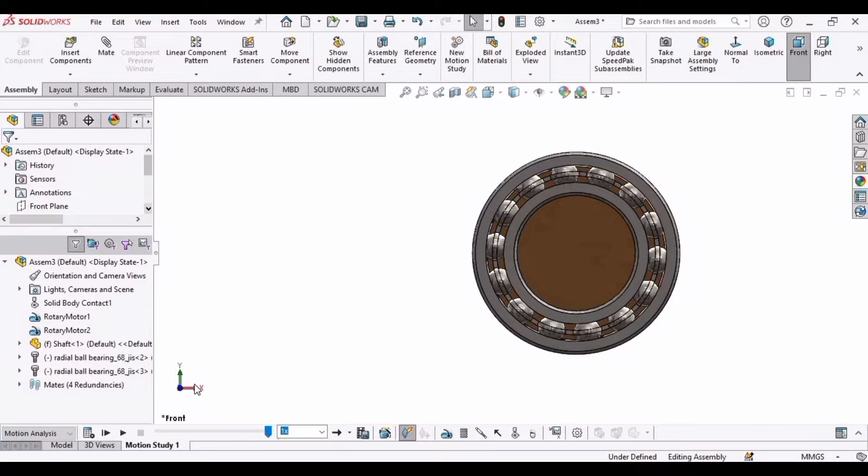Welcome to this detailed SolidWorks tutorial in which we will be designing the shaft, bearing, and performing motion study analysis on these. Let's begin. Select file, click on new, select part here, and then click OK.

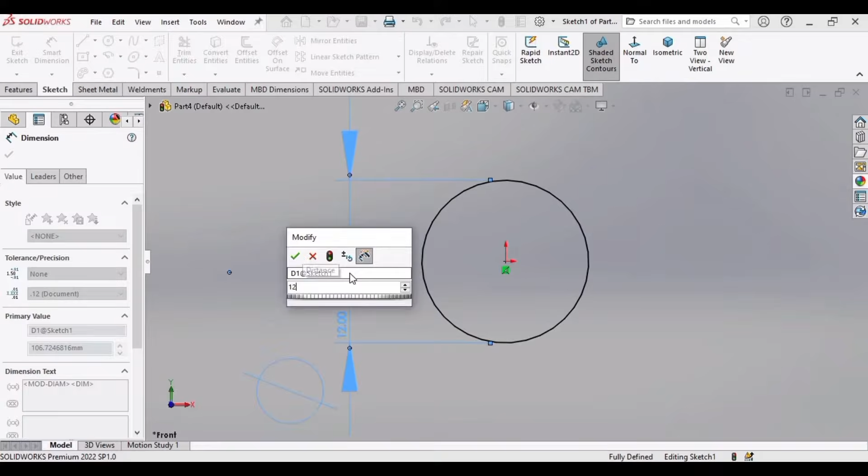Select front plane and click on sketch. Make a circle at this origin. Now let's define the diameter of this circle as 12 mm. Make sure that you have selected mmgs as units here.

Now go to features, select extruded boss base, and then simply extrude it up to 8 mm. Check this box. Now select this face, click on sketch.

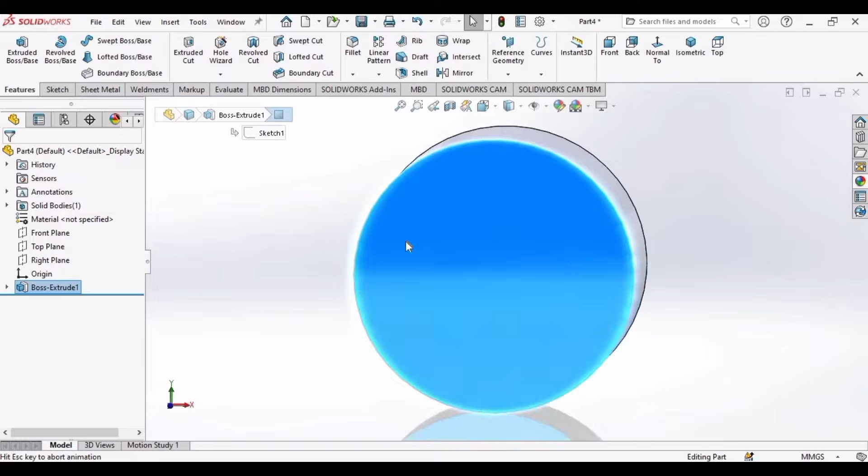Make another circle at the origin. This time we will be making a bit bigger circle. Then we will define the diameter of this circle as 18 mm.

Go to features, select extruded boss base, and extrude it up to 14 mm. And then check this box.

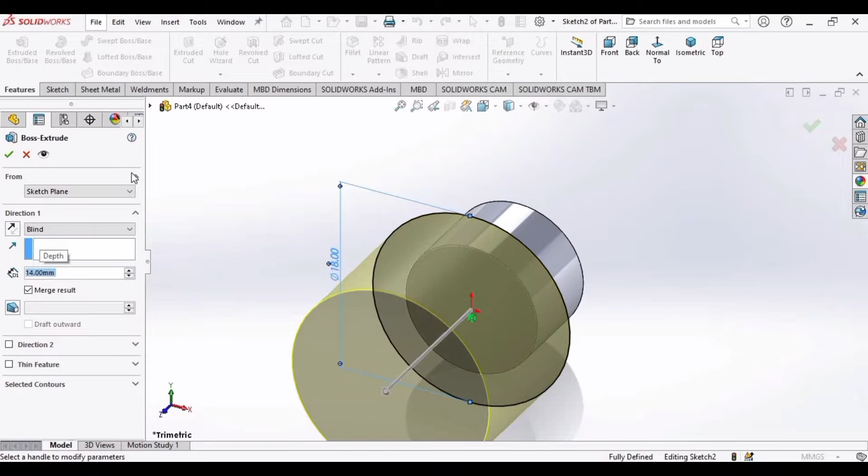Now we will perform the mirror operation, but before that we have to make a plane. So select plane, select this surface, and set this dimension to 0. This plane has been created.

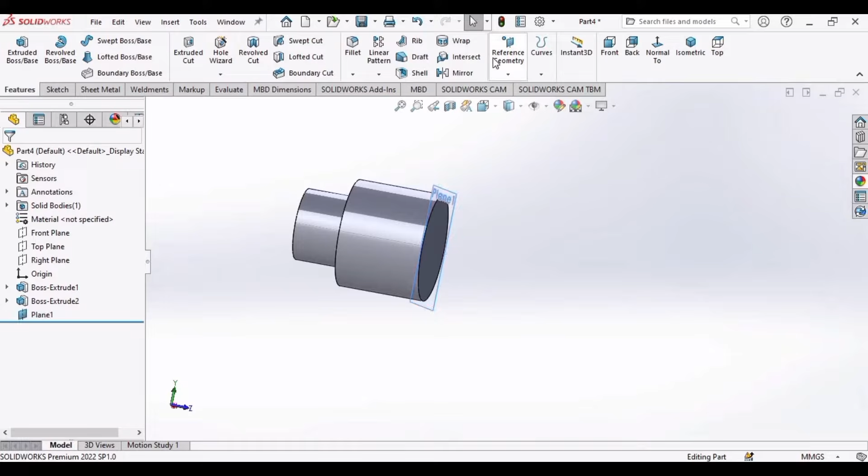Now check this box. Now select mirror, and here in this window select this plane, and we have to mirror the bodies and not the features.

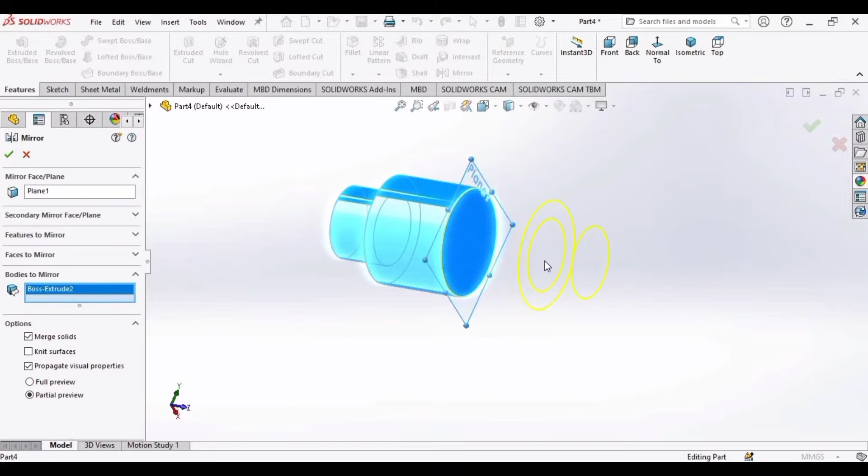Make sure that you have selected bodies to mirror, and in bodies to mirror select this shaft, and you can see these circles. Click OK, and we have successfully mirrored this shaft.

Right click on this plane and hide this plane. So we are done with designing our first component.

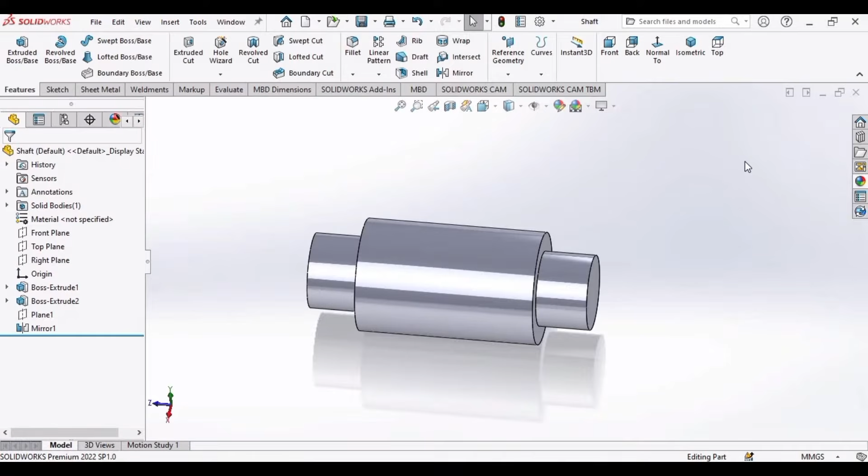Save this file as shaft, click on save, and now close this window. Now click on file and open an assembly file. This time click on assembly, click OK.

This window will be opened. From this, insert the shaft that we have just created. So we can orient this shaft.

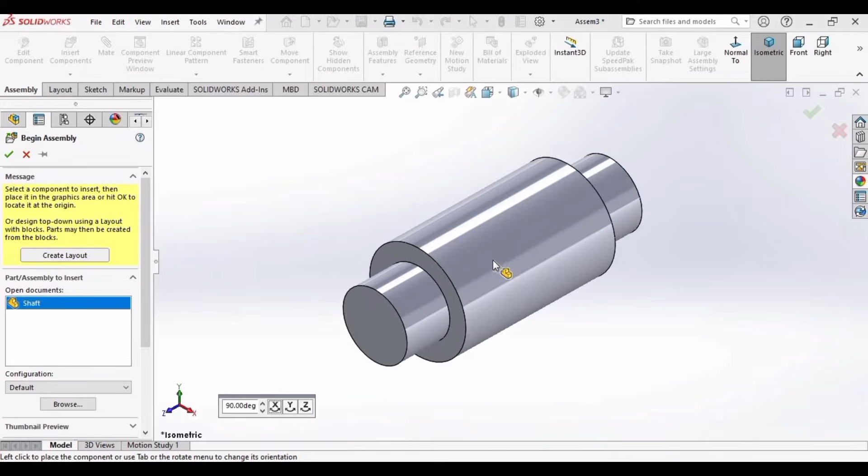In X or Y axis, this looks better. Place it here in the environment window.

Now let's apply some appearance to this shaft. In metal you can select any color. I'm assigning this brass color.

Now it's time to insert the bearings from the design library. Let me show you from the start. Let me close these tabs.

So here we have the toolbox. In case you do not have this, just drop down this menu, click on add-ins, and select these two boxes, this one, and then click OK.

Drop down this toolbox menu, scroll down, and expand this JIS bar. In this we have bearings. We have two options for bearings: ball bearing and roller bearing.

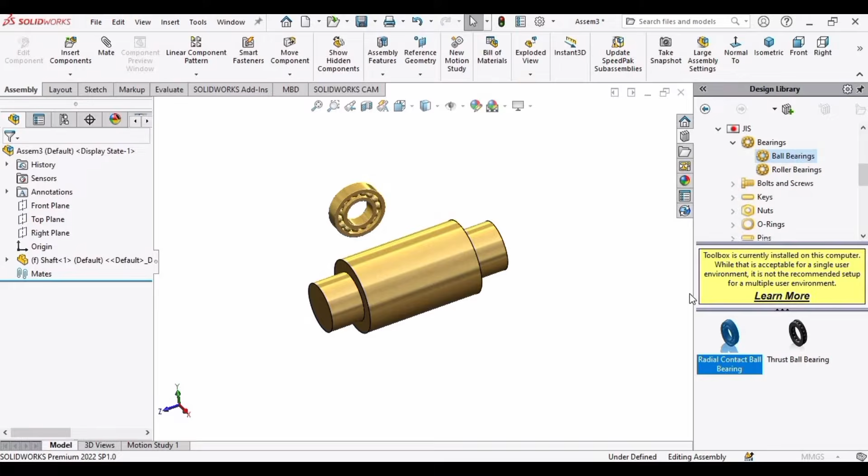Here we have also two types of bearings. We need this radial contact ball bearing. Now let's define the parameters of this.

In size window we need 2812. You have to scroll down and just look at the last one or two digits. We need 12 in the last two digits.

You have to scroll down like this and just look at the last two digits: 10, 11, 12, and in 12 just look at 2812.

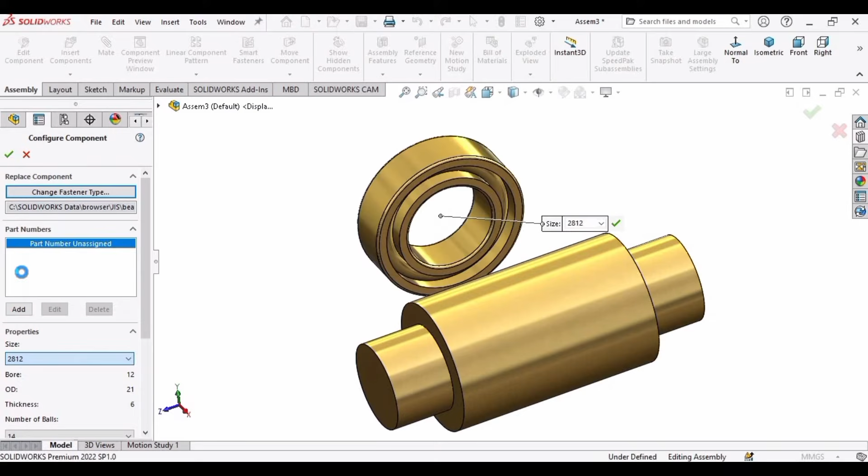So here in this select the detailed option, these balls will appear, and from here insert the cage as well. You can see this cage has been inserted. Just check this box.

Automatically this second bearing will appear here in this window. Since we need two bearings, click here, and we do not need the third bearing, so close this window.

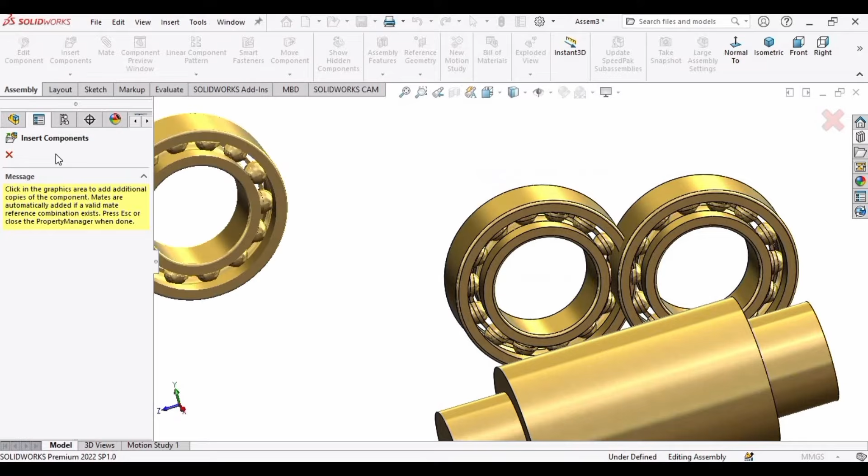So we have these two bearings now, and let's define some appearance. Let's change the color. From this window you have to select and delete all of these previous colors.

Just select and delete, and now let's define the colors again.

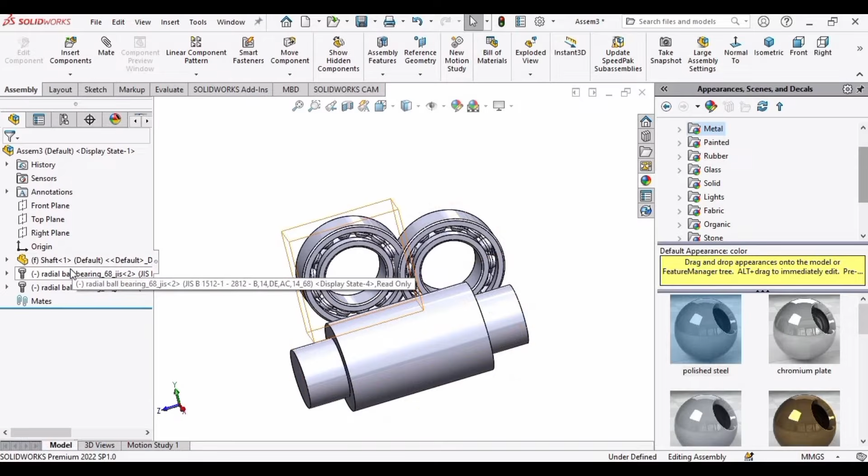Come to this window again and select the shaft first and apply this color, and select these bearings from here and apply this polished steel or any color you like.

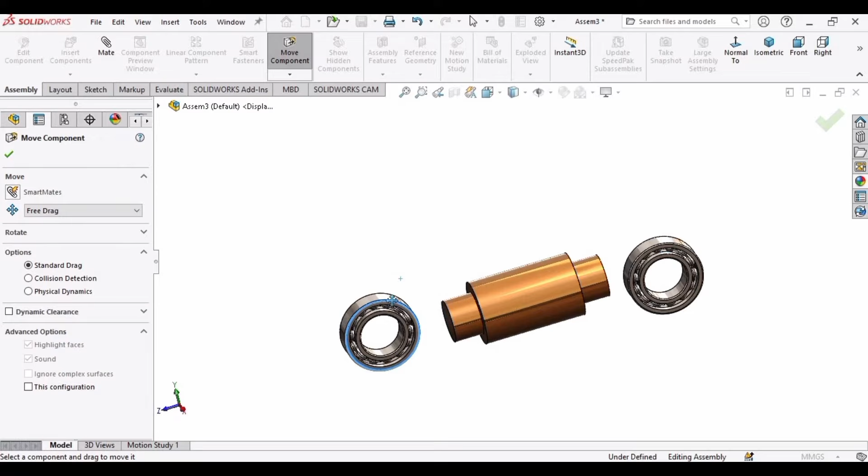Now just click on move and place the bearings at the right position. And now let's rotate these bearings.

Okay, let me tell you one more thing. This shaft should be fixed and not float.

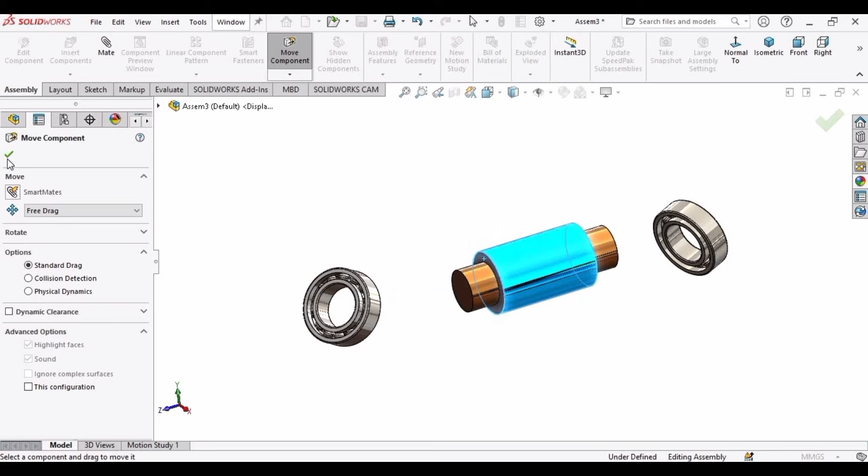Okay, so this is float now, which means that this can move like this. We do not need float, we need fixed shaft, which means it cannot move. Only bearings can rotate and move.

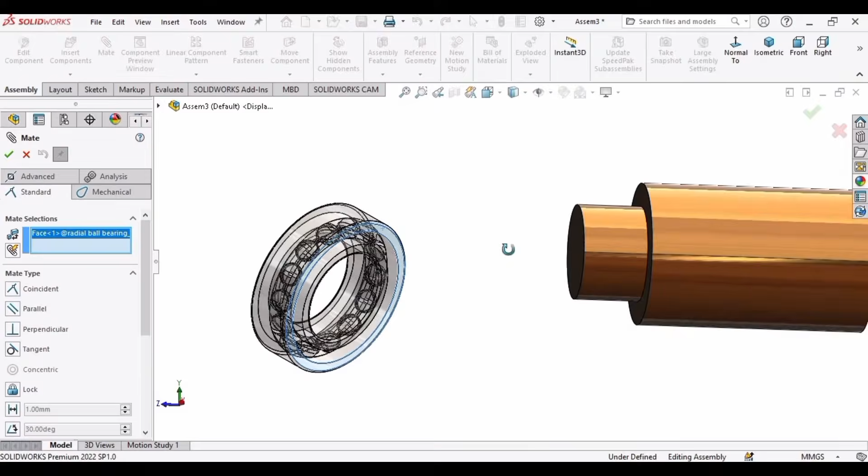Now let's rotate this bearing a little bit more, and then click on mate. Select this face of the bearing and this face of the shaft and click OK.

Now select the inner bore of the bearing and outer diameter of the shaft. These two are selected here, and then click OK.

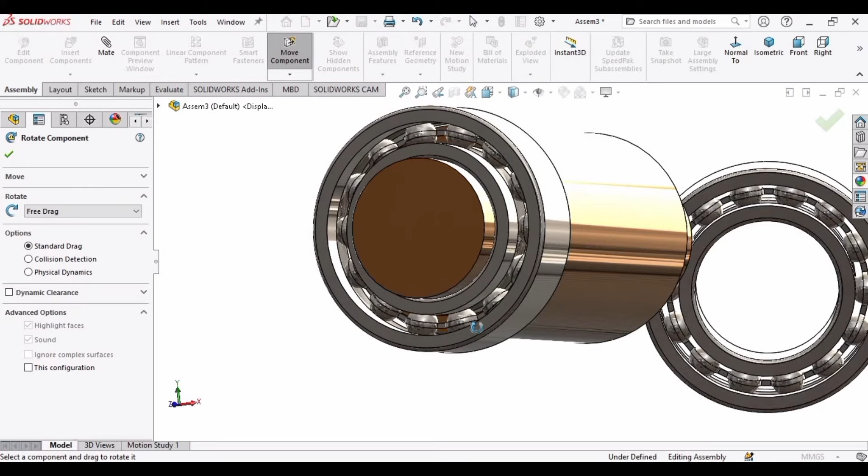Now let's rotate this and verify whether it rotates or not. Click on rotate here and manually rotate this bearing. It is working perfectly. Now let's assemble the second bearing.

Click on mate. Select this surface of the bearing and this surface of the shaft.

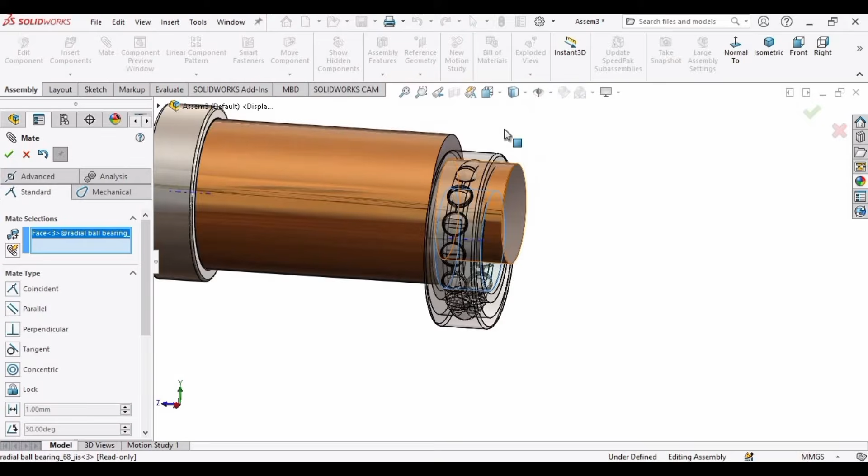Then select this bore of the bearing and outer diameter of the shaft. Zoom in and select this surface of the shaft, then click OK.

Now let's manually check this by rotating this bearing. This is also working fine. Now it's time to perform the motion study.

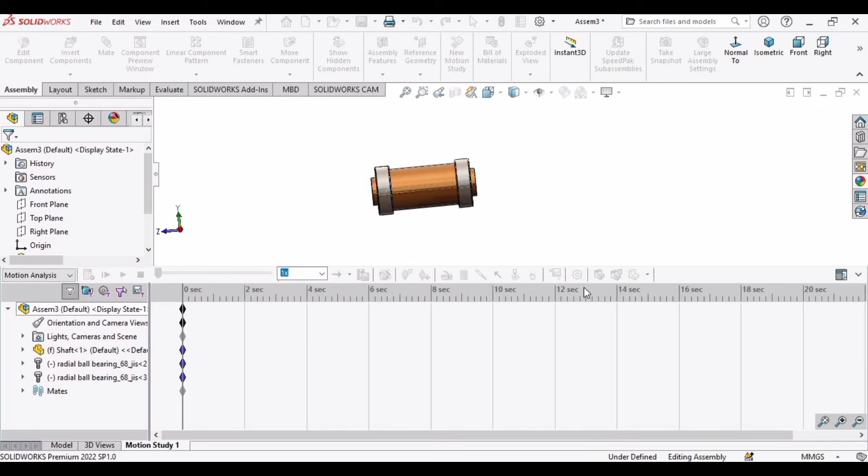Go to motion study, expand this bar, select motion analysis, click on settings. This is 25, this is OK, and select this contact option. Select bearing, shaft, and this bearing as well. Click OK.

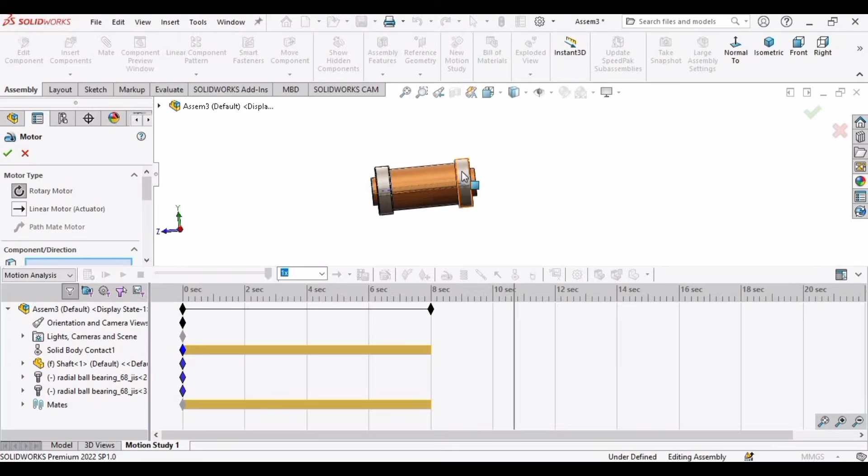Now expand this up to 8 or 10, and then select this motor and assign the direction to the bearing and not the shaft.

And then we have to specify the speed. This 100 is just too much, we need just 10 rpm.

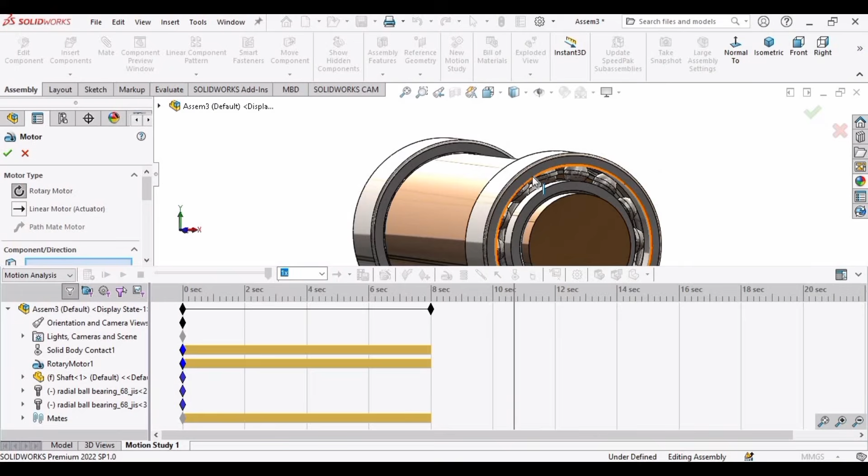After that click on this motor again, and this time assign the direction to the other side of the bearing. Assign the speed 10 rpm. This is okay.

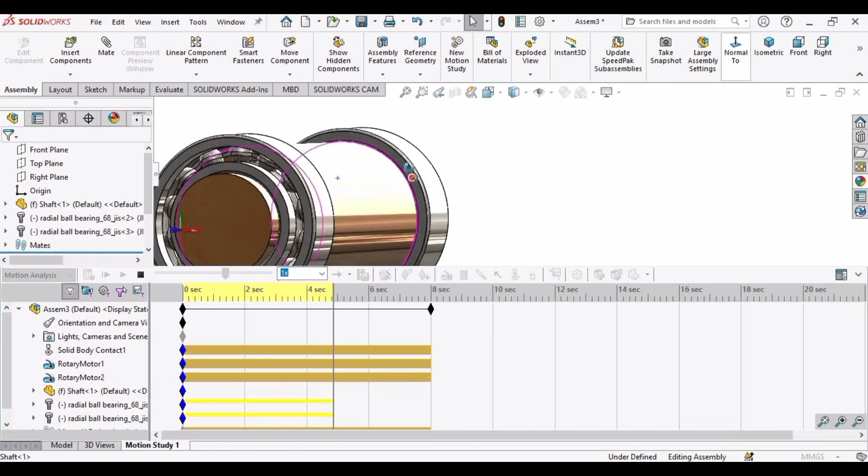Now just click on calculate. It will take some time to start this process. You can view it here, it is working properly.

From here you can see I am manually moving this part, but we can do it automatically as well. Just drag it up to here, right click on it, and in view orientation click on isometric.

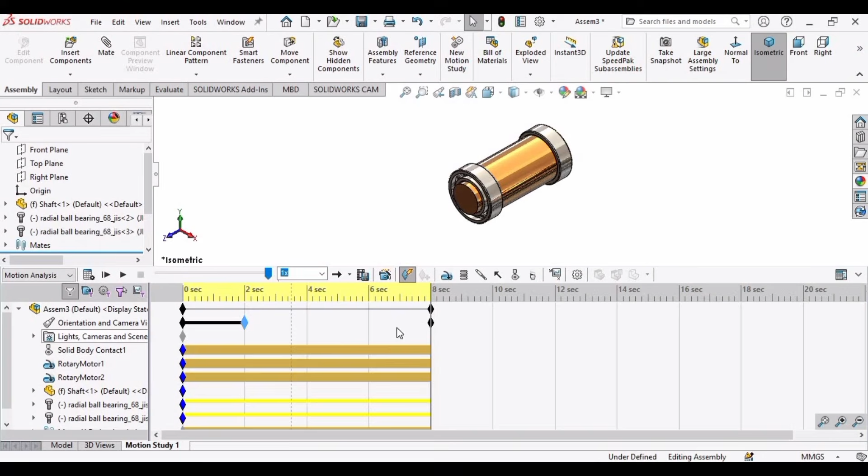Select this, Control C and Control V. This will appear. Right click on it. In view orientation select this front.

Drag this up to this midpoint of 4 seconds, and then click on the play button, and you can see this process has become automatic now.